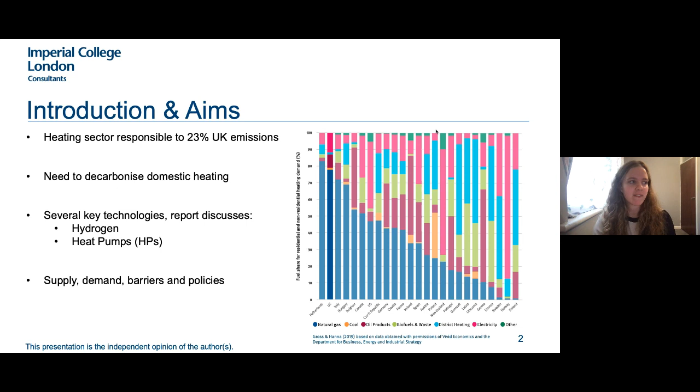So, when it comes to decarbonising domestic heat, some of the general barriers that we'll face, regardless of the technology that we choose, are building energy efficiency, industry skills and training, and public awareness. The UK's housing stock is one of the oldest and least thermally efficient in Europe. There is an urgent need, therefore, to improve the thermal efficiency of UK buildings, both as a means to reduce heating demand and to optimise performance of heat pumps or hydrogen boilers.

In terms of industry skills and training, there are currently significant shortages of skilled workers in heat pump installation and maintenance. And on top of this, gas installers don't currently have the necessary skills or training for the installation of hydrogen boilers. The current UK skill base in heating and energy efficiency industries needs to be scaled up, regardless of which technology we choose.

In terms of public awareness, low carbon or alternative heating systems remain unfamiliar and poorly understood amongst the general public. A survey of 2,000 customers carried out by the Energy Systems Catapult revealed that only half of respondents were aware of low carbon heating. Many thought that it would be extremely expensive, and some weren't even aware that natural gas boilers contributed towards climate change.

So you might ask yourself, why hydrogen? Well, one of the appeals of hydrogen is that at the point of use, there are no carbon dioxide emissions produced. As well as this, if it's deployable, a hydrogen grid could mirror the usage of natural gas within homes. However, currently the way we produce hydrogen is not sustainable. Currently, 97% of hydrogen is reliant on fossil fuels worldwide, and this results in 830 million tonnes of carbon dioxide being emitted per year. This is the same as the emissions of the UK and Indonesia combined.

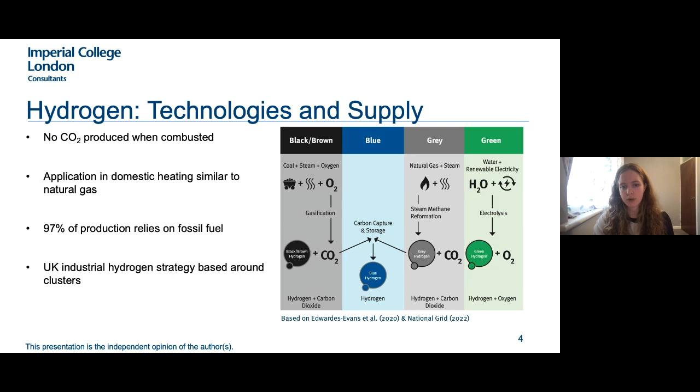The current hydrogen production capacity in the UK is about 3 to 5 gigawatts, and this is used in industry. The UK's current industrial strategy for decarbonisation plans to utilise what are called low carbon industrial clusters. These are places where there's a coordinated effort between industries to locate to one area, reducing the cost of decarbonisation. So if it was theoretically possible to produce enough low carbon hydrogen to supply the UK, we'd need a means of distributing it.

One way this could be done is through repurposing the current natural gas grid, which consists of transmission, distribution, and service pipelines. A switch to hydrogen, however, isn't as simple as a like-for-like swap between natural gas and hydrogen. The suitability of the pipeline to carry hydrogen depends on its material, pressure, age, and also the condition of the pipework.

It is important to note there's currently a program underway which started in 2002 and will end in 2032, called the Iron Mains Replacement Program, and this aims to replace all iron pipework with polyethylene pipes, which are plastic and more adept at carrying hydrogen.

However, once this is complete, we still need to replace the high-strength steel pipelines if we wish to repurpose the transmission pipeline, and this will come at a large cost. A transition to 100% hydrogen in any given area, therefore, will cause some level of disruption to householders in existing properties. Post-installation, consumers are likely to experience the use of a hydrogen boiler as relatively familiar technology, given the similarities it would bear to a gas boiler, currently very widespread in the UK.

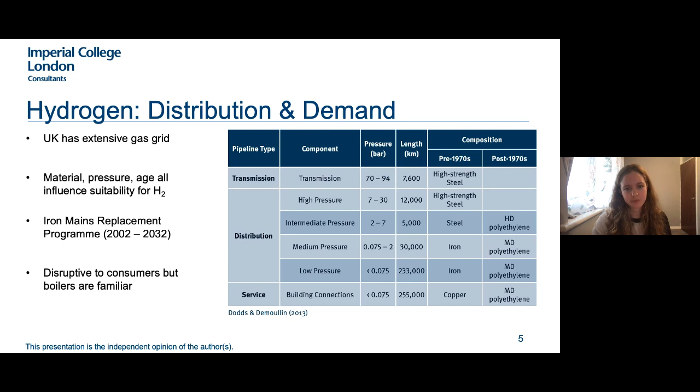So what barriers might we face when it comes to hydrogen deployment? Well, I think the main one is supply. The ability to meet demand could be a significant barrier in hydrogen's household use, as there are very limited low carbon sources at present, and its use in sectors that are harder to decarbonise, such as aviation or shipping, will likely take priority.

At present, low carbon hydrogen is not yet cost competitive, and this poses a major barrier to its deployment. In terms of green hydrogen, this is more expensive to produce than blue, and there might be potential to reduce this from scaling up deployment of renewables and electrolyzers. It would also require a greater capacity of renewable generation than if we were to use that electricity directly, so this would place additional demands upon electrification.

With regards to blue hydrogen, there are currently no carbon capture and storage facilities in the UK, and CCS in general has not been deployed at the scale that was anticipated. Without CCS, hydrogen derived from methane cannot be low carbon, which is a requirement for a low carbon solution. Hydrogen would also require large volumes of storage to cope with periods of high heating demand, and any associated safety risks with the storage of hydrogen in salt caverns would need to be managed effectively.

If hydrogen is used within residences, this also would require a certain amount of maintaining safety. So whilst no carbon monoxide or dioxide emissions are produced at the point of combustion, the hotter flame temperature reached by hydrogen results in the formation of nitrogen oxides, and this will need to be carefully regulated if it's used in the home. Determining if it's safe for use is an area of priority in the coming years, and this will be aided by further hydrogen trials.

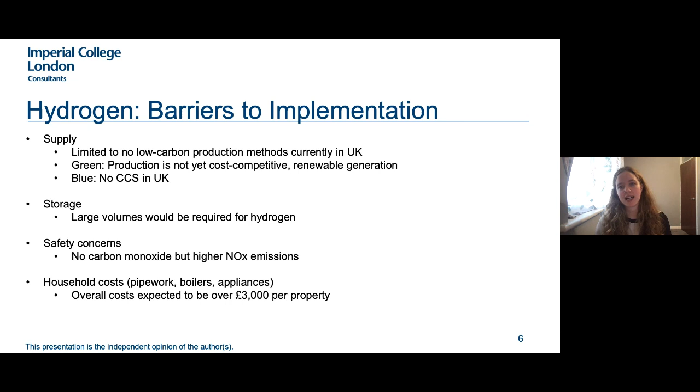Studies by Sadler and Element Energy suggest costs of upwards of £3,000 per property for a hydrogen conversion, and this would include internal pipework, boilers and appliances, and this could be a major barrier in uptake.

So when it comes to hydrogen policy, if a hydrogen-based strategy is put in place, policy intervention stands to play a crucial role to ensure its security of supply. The government plans to make a strategic decision in 2026 about the contribution of hydrogen to heating buildings to help achieve net zero.

So blending, which blends a certain percentage of hydrogen into natural gas, could help create demand for low carbon hydrogen in domestic settings and would require the adjustment of current regulations, which could help pave the way for a long-term hydrogen solution. However, there are other sectors that might be able to benefit more from hydrogen used in this way.

Hydrogen trials have successfully taken place using the process of blending, most notably at Keele University. There are plans to expand this to a public network in the North East of England. In terms of full hydrogen trials, the UK government has outlined its ambition to support full hydrogen heating trials in local neighbourhoods by 2023 through the use of hydrogen boilers, and in large villages by 2025. And if these go well, they will build up to a pilot hydrogen town by the end of the decade.

In terms of grants and support, between 2022, so this very year, and 2025, a £240 million net zero hydrogen fund will support the deployment of low carbon hydrogen. This is designed to de-risk private sector investment and lessen the lifetime costs of projects. However, it's unclear how much will go towards domestic heating as opposed to other sectors. Business models are another important aspect.

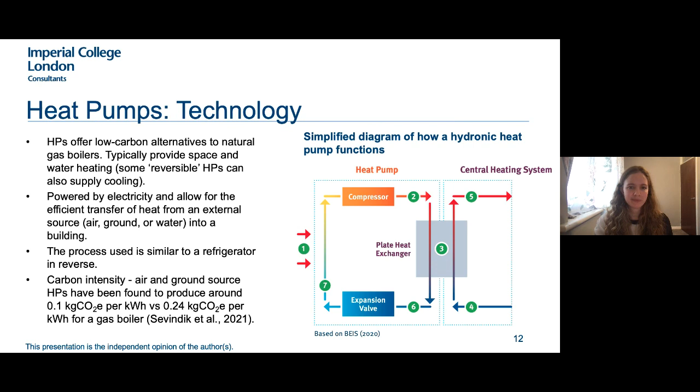Heat pumps offer a more efficient form of electric heating compared to direct electric heaters, and they therefore also offer low carbon alternatives to natural gas boilers. Heat pumps typically provide space and water heating.

Some reversible heat pumps can provide cooling as well. Heat pumps are powered by electricity and allow for the efficient transfer of heat from an external source, such as the air, ground or water, into a building. So the process is similar to a fridge operating in reverse.

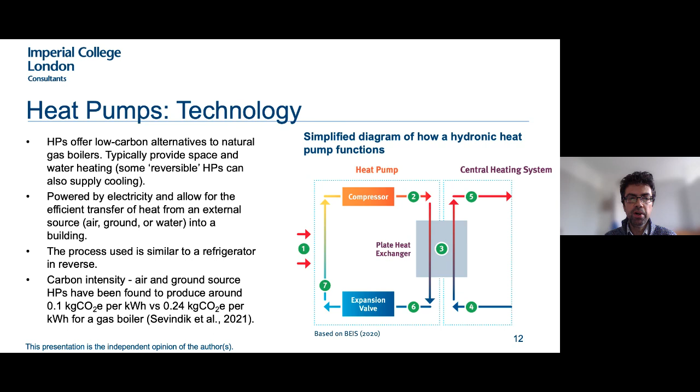In the UK, around 85% of homes are connected to the gas grid, and as of 2020 there was a total stock of 265,000 heat pumps installed. But the government has a target to install 600,000 heat pumps per year from 2028, and previous Climate Change Committee scenarios have suggested that we need heat pumps installed in the order of many millions.

Countries such as France and Sweden have 3 million and 2 million heat pumps installed respectively. In the chart on the right, the UK performs very poorly, having 7 installed heat pumps per 1,000 households in 2018. Compare that to the likes of Norway, Sweden and Finland, where the equivalent figure is between 300 and 500 per 1,000 households. In the UK, there's just over 1,000 installation companies.

Most of those are likely to be pretty small, and only several manufacturers which produce heat pumps in the UK. By contrast, in terms of boilers in the UK, 55% of demand is met by domestic manufacturers. But since boilers and air conditioners use similar components and require similar skills to heat pump production, there may be some scope for transferability. We could learn from some European manufacturers which use the same facilities for air conditioning and heat pump production.

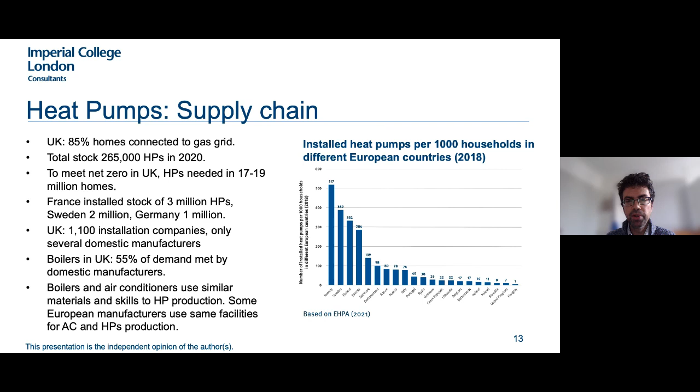There's a range of barriers that the report identifies to wider deployment of heat pumps in the UK. The first is upfront purchase costs. A typical cost of installing an air-to-water heat pump, which is the most common kind in the UK, is around £9,000 at least, several times the cost of replacing a gas boiler.

There have also been a number of financial incentives supporting heat pumps in the UK over the last 15 years, not least the renewable heat incentive most recently, but this is due to be replaced by boiler upgrade scheme grants, which from the level of funding attached to it would only support around 90,000 heat pump installations. Financial incentives generally have been inconsistent in terms of how they're designed and the scale of support.

Another barrier is that in the UK, electricity price still incorporates higher policy costs of decarbonisation, and carbon price in general isn't reflected in natural gas prices. Conversely, carbon dioxide emissions from household electricity use in the UK have decreased due to higher installed capacity of renewables.

Heat pumps also require competent installation to maximise performance, and there tends to be an issue with heat pumps requiring more space than gas combi boilers.

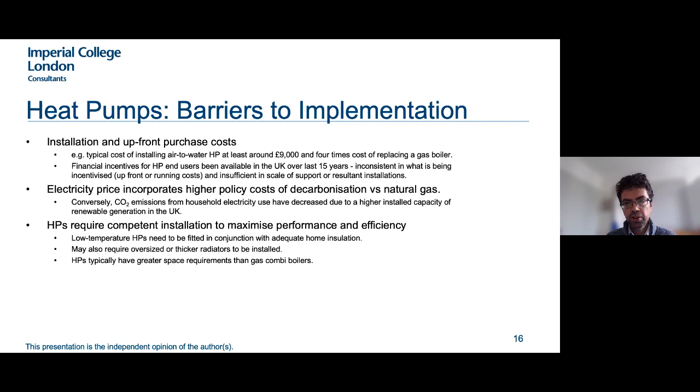Another issue is the impact on total and peak electricity demand. While heat demand from heat pumps is more distributed across different parts of the day compared to gas boilers, there would still be a need to spread heat demand across the day through thermal storage or smart controls.

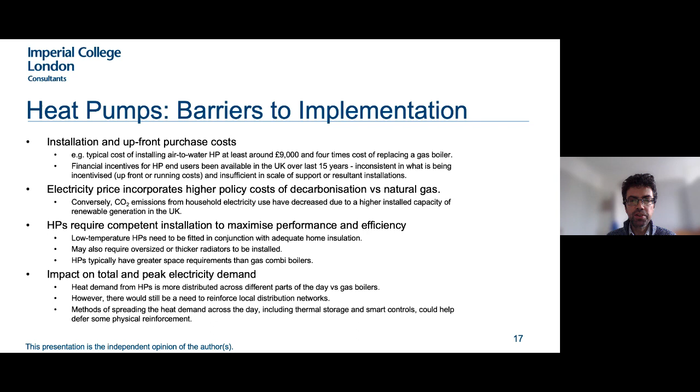We also identified in the study some analyses that look at the comparative costs of electrified heat and hydrogen decarbonisation scenarios. There was analysis done for the Climate Change Committee in 2018, which looked at overall systems costs and concluded that the overall systems costs of making such a transition was similar for electrified heat versus hydrogen heating pathways, but perhaps slightly less for electrification.

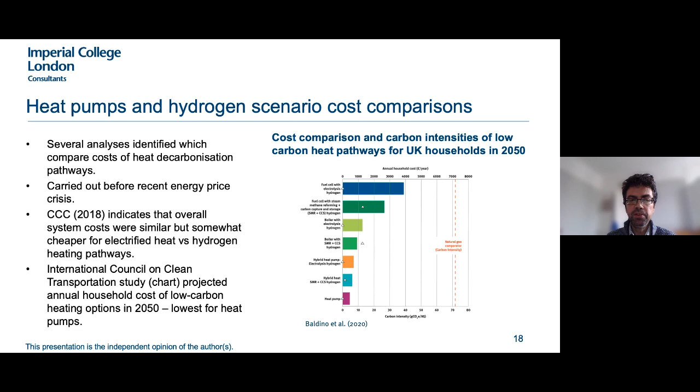A separate study by the International Council on Clean Transportation, shown in the chart, looked at the annual household cost of different low carbon heat options in 2050, and concluded that heat pumps would have the lowest cost compared to other green or blue hydrogen options.

So a few thoughts on heat policy support for heat pumps. UK, we think, should follow Germany and France by including a carbon price in the cost of gas bills and transferring policy costs from electricity bills to general taxation.

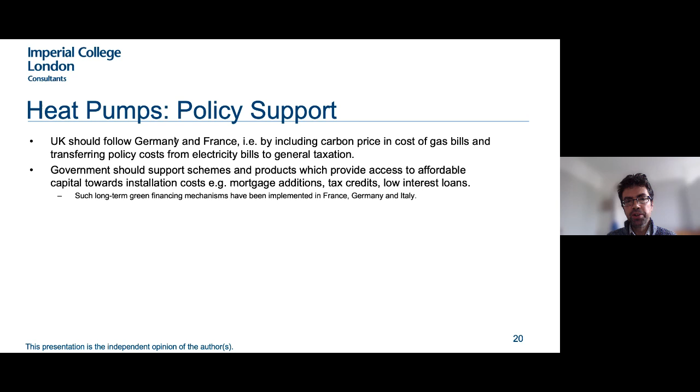In addition to upfront grants, we recommend that the government should support schemes and products which provide access to affordable capital. These could draw upon examples in France, Germany and Italy, and could include mortgage additions, tax credits and low interest loans.

We also recommend that the UK should look to set up a national testing centre for heat pumps, which would both test the performance of heat pump products, but also help to develop new and improved heat pumps. We identified that in Europe, such test centres have been set up on a long-term basis, whereas in the UK, there was a national UK field trial of heat pumps, but this took place quite a long time ago now.

And heat pump industry representation is somewhat fragmented. There are, for example, 3 separate heat pump associations.

We also note in the report the potential to engage consumers through smart heat and flexibility, for example, through heat as a service business models, whereby customers pay for a specific level of thermal comfort or flexibility.

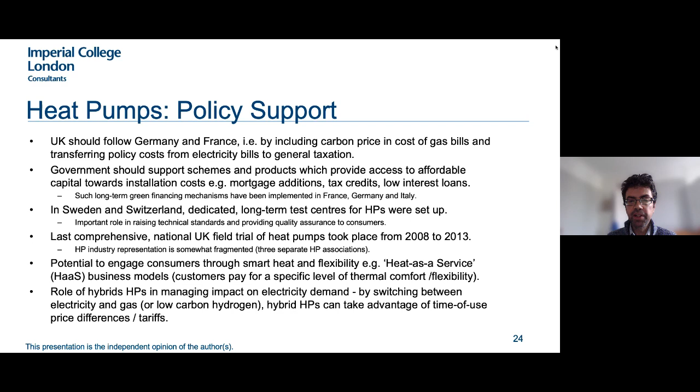And we note the potential role of hybrid heat pumps, so these are heat pumps that include either a heat pump component and a gas or hydrogen boiler component. These could help to manage impacts on electricity demand from heat pumps by switching between electricity and gas or hydrogen. Hybrid heat pumps could take advantage of time of use price differences.

So in terms of our final recommendations, beyond those that I already mentioned for heat pumps, we do recommend that the government should support longer term grants than perhaps the boiler upgrade scheme of at least 10 years to increase revenue certainty in the heat pump industry.

We also recommend that UK heat pump manufacturing is supported through incentives for UK based manufacturers of complementary technologies such as gas boilers and air conditioners to diversify production to heat pumps.

And following the example of others, we recommend the establishment of a heat pump council comprising members from government, regulators, industry and civil society to better help coordinate consumer engagement with heat pumps.

And then finally, in addition to further clarity on the role of hybrid heat pumps, we recommend that low carbon hydrogen should be prioritised strategically in hard to electrify sectors, and that the development of electrolyzers should be supported to improve the cost effectiveness of green hydrogen.

But our overall conclusion is that over the next 10 years, we should focus on deploying currently available solutions, including energy efficiency, heat pumps and heat networks. Thank you very much.

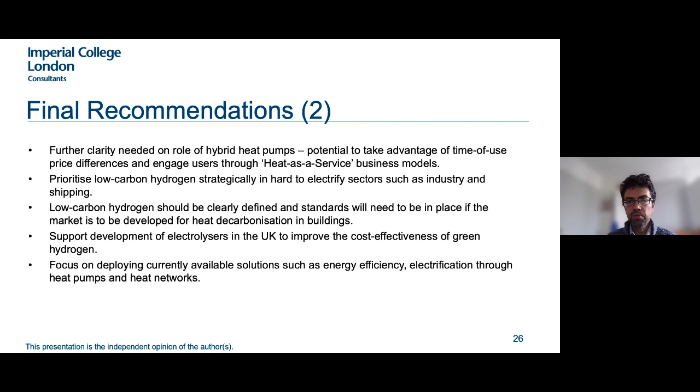Okay, thank you, Amy and Richard, for running us through your paper. I'd now like to introduce our expert panel members.

Caroline Bragg is the Director of Policy and Research at the Association for Decentralised Energy. Caroline's responsible for the development of the association's policy work and its research arm, ACE Research, working closely with members and policymakers to promote the sustainable development of the decentralised energy sector in the UK. Caroline has extensive previous experience in the UK energy and housing sectors.

Dr. Jan Rosenow is the Principal and Director of European Programmes at the Regulatory Assistance Project. As the Director of European Programmes, Jan leads RAP's initiatives in Europe on power market design and efficiency first. He's responsible for all aspects of leadership, management and financial viability of RAP's work in Europe. Jan serves on the Executive Committee of the International Energy Agency's Demand Side Management Programme and sits on the board of the European Council for an Energy Efficient Economy.

And then finally, Dr. Nixon Sunny, researcher from Imperial College. Nixon has a PhD in chemical engineering from Imperial. During his PhD, he developed modelling tools to analyse investments in hydrogen and carbon capture infrastructure. He's a frequent speaker at international conferences and has given dozens of technical presentations on multinational Horizon 2020 projects. His areas of expertise include carbon neutral gas and electricity infrastructure design, heating and industrial sectors, sustainability assessments, along with environmental policy and regulation.